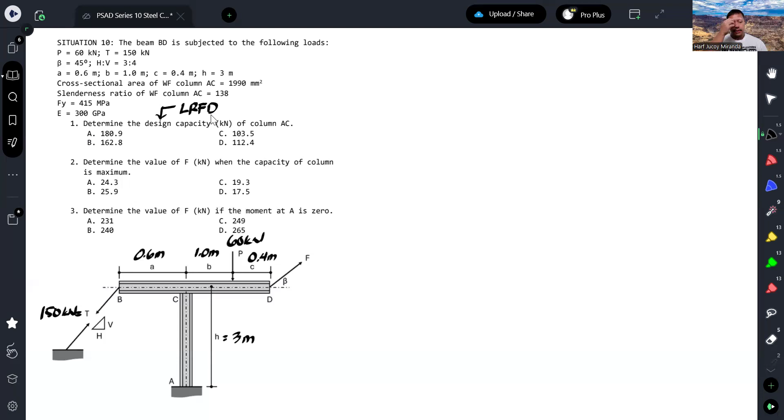So recall, yung slenderness ratio ay kino-compare dun sa limiting slenderness ratio na 4.71 square root of E over Fy. We have 4.71 times square root of E over Fy, that gives us 103.4. That means this is larger, so yung column natin ay long. Pag magko-compute tayo ng FCR, ang formula ay 0.877 of Fe, where Fe is the Euler's buckling stress, pi squared E over slenderness ratio squared.

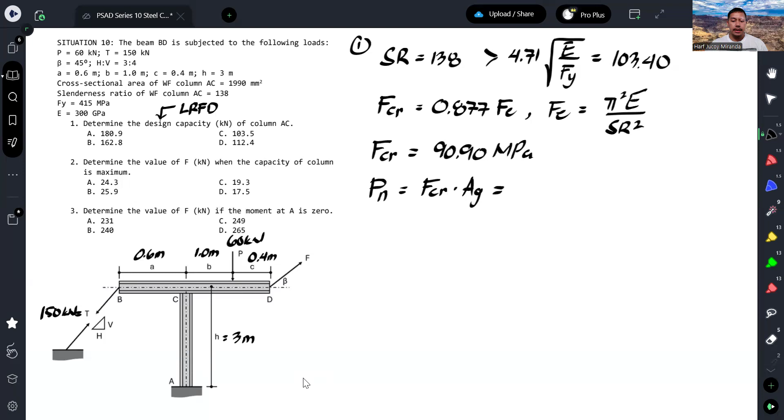So computin na natin kaagad yung FCR: 0.877 of pi squared E over the slenderness ratio squared. So 90.9 megapascal. Then the nominal strength is just FCR times the gross area, 1,990. This is in Newton, so divide by 1,000. That's 180.89 kilonewtons. Therefore, our answer is letter A.

Dagdag ko na lang sa discussion, kapag yung slenderness ratio ay mas mababa sa limiting slenderness ratio, yung gagamitin mong formula for FCR is 0.658 raised to Fy over Fe, times Fy. Yun lang yung pinagkaiba. This is for NSCP 2015. Pero for the old NSCP code,

yung slenderness ratio, i-compare natin sa square root of 2 pi squared E over Fy, which is Cc. Kapag ito ay mas maliit, intermediate column, so medyo mahaba yung formula. The allowable stress is equal to 1 minus slenderness ratio over Cc squared over 2, times Fy over factor of safety. Yung factor of safety is 5 over 3 plus 3 over 8 slenderness ratio over Cc minus 1 over 8 slenderness ratio over Cc cubed.

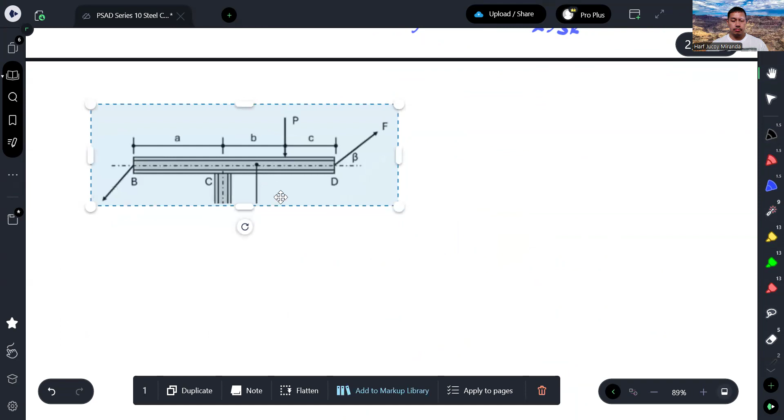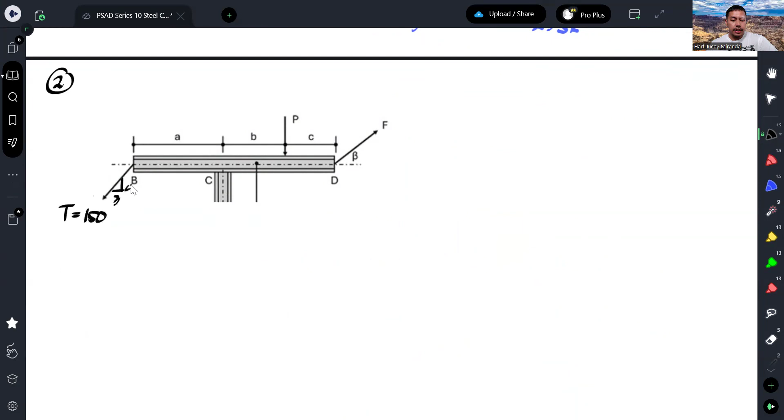Dito, ang gagawin natin is i-free body diagram natin yung beam lang. I-isolate natin yung beam. So this is for number 2. According to the given, this is tension equal to 150. Ito ay 3 horizontal, 4 vertical, so malamang 5 na to. This is 60 kilonewtons. Ito ay 0.6, ito ay 1, ito ay 0.4. Tapos ito ay 45 degrees.

Tapos yung force dito, i-set natin na equal sa 180.89 kilonewtons. Pinapahanap lang yung F. Para makuha natin yung F, we can take summation of forces vertical. Let's take summation of forces vertical.

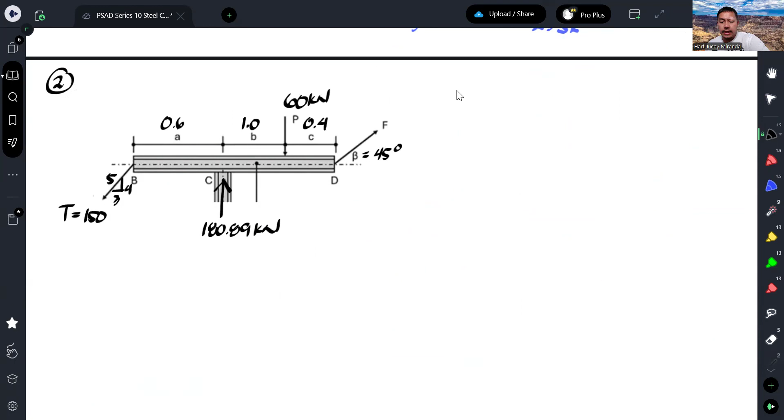Okay, so the reason why I want to use summation of forces vertical, yung meron pa kasi ibang force na nag-act dun sa C. Meron pa tayo, take note, meron pa tayo dito horizontal force na unknown, Cx. Ito yung Cy. Kasi di ba nakakonekta yung beam natin doon. So pag nag-summation of forces horizontal tayo, dalawa pa yung unknown. Pero pag nag-summation of forces vertical tayo, itong F lang yung unknown. Kaya yun yung napili ko.

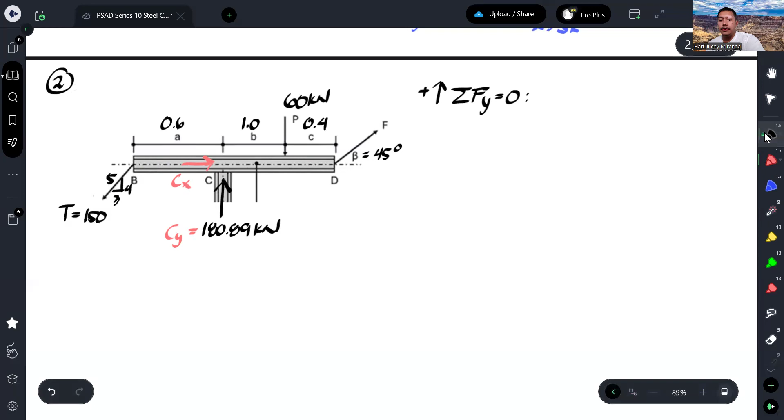So we have downward yung 60. Downward din yung Y component ng 150. And then upward yung capacity ng column. And then ano pa? Upward yung F sin 45. Okay, and from here we should be able to calculate F.

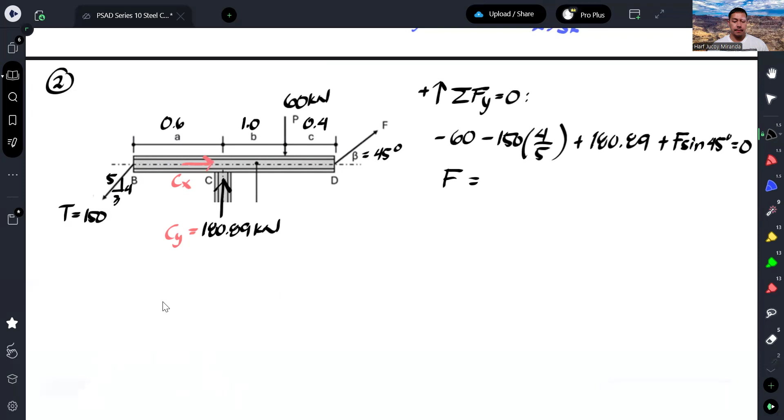So that's 60 plus 150 times 4 over 5 minus itong 180.89 over sin 45. Okay, sorry. Actually, doon sa previous na sagot natin, dahil design capacity nga pala ang tinatanong, hindi nominal, hindi ito yung sagot. Okay, so mag-iingat tayo sa mga ganyang question sa board exam. So hindi ito yung sagot.

Ang hinahanap sa atin is yung design. So ibig sabihin yung merong reduction factor. So actually patibong din to sa choices. Trap yan. So ang kailangan natin is actually yung phi Pn, which is phi 0.9 ng Pn. So times natin ng 0.9. So ang tamang sagot ay 162.8 kilonewton. So the correct answer should be 162.8. So this should be letter B.

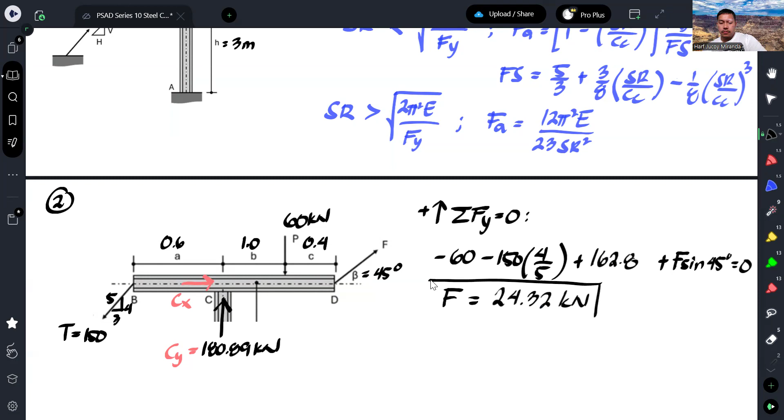So trap yung letter A, kasi nominal lang to. Ang hinahanap natin is design, ibig sabihin yung meron ng reduction factor. So dapat ito ay 162.8. Our calculation earlier, i-revise lang natin to na 162.8. And the answer is 24.32. So that is the value of F kapag yung capacity ng column natin is maximum, which is yung design capacity niya.

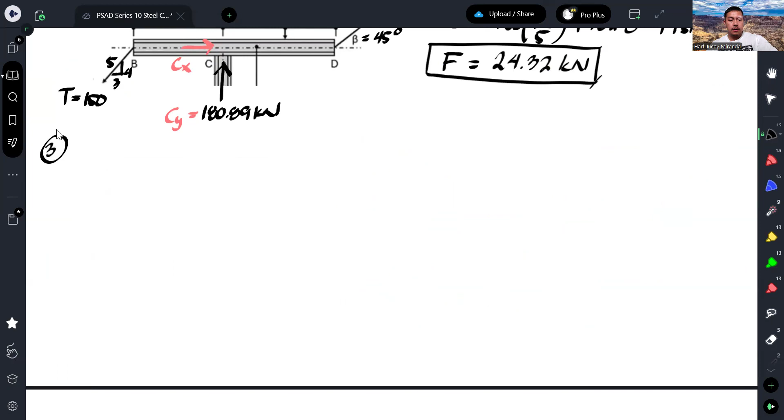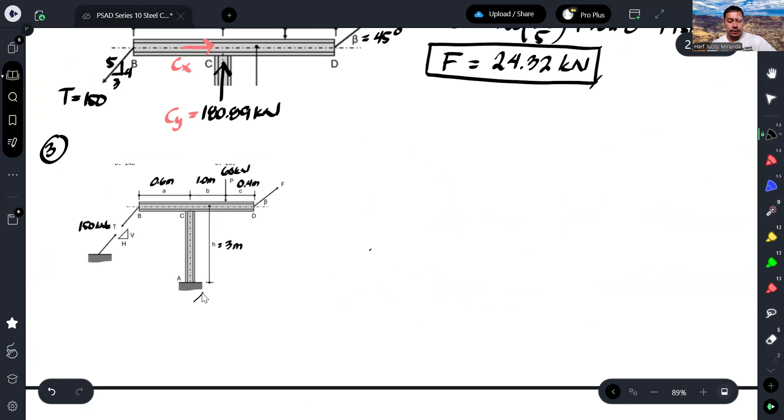And then finally, determine the value of F if the moment at A is 0. So basically, i-adapt lang natin itong free body diagram na to kasi kung dito tayo mag-free body diagram sa beam, hindi natin ma-expose itong support sa A. Kaya mag-i-stick ako dito sa free body diagram na to, so I'll just copy this for number 3. So ang moment sa A ay 0. So para mahanap natin yung F, we will just take summation of moment at A and equate it to 0. Let's assume counterclockwise positive.

So first, merong components ito, vertical and horizontal. Yung horizontal component niya ay 150 times 3 over 5, since 3 horizontal, 4 vertical. Ito naman ay 150 times 4 over 5. Tapos ganun din itong force F. Meron siyang horizontal and vertical component. Yung horizontal component niya is F cosine of beta, and yung vertical niya is F sine of beta. So yun yung mga iikot sa A natin.

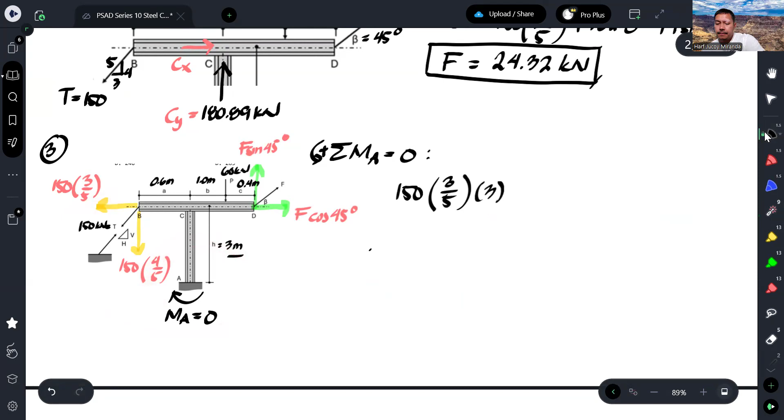Unahin natin itong sa kaliwa. So 150 times 3 over 5. Ang moment arm natin is itong 3, so times 3. Ang rotation nito about A will be counterclockwise, so positive. Plus 150 times 4 over 5; ang moment arm para sa vertical component is 0.6, also counterclockwise, so plus. And don't forget, meron ditong 60 kilonewton; ang moment arm niya is 1, and ang rotation niya ay clockwise, so negative.

And then we have F sine 45, na ang moment arm ay 1 plus 0.4 or 1.4, and the rotation is counterclockwise, so positive. And then we have F cosine 45, na ang moment arm is 3, and the rotation is clockwise, so negative. Of course, may reaction pa dito na vertical at horizontal, kaya lang dun tayo nag-moment, kaya wala nang moment yung mga yun. Plus, yung moment sa fixed support ay 0. So ito na equation natin, and we should be able to solve for F.

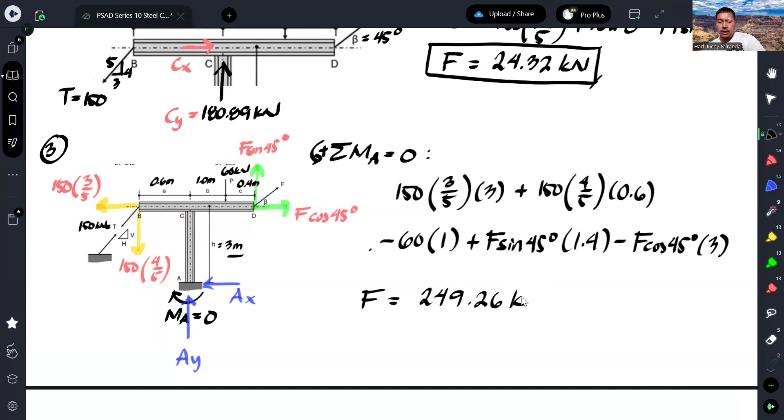So 150 times 3 over 5 times 3 plus 150 times 4 over 5 times 0.6 minus 60 times 1, over 1.4 sine 45 minus... actually dapat baliktad. Pag transpose, ito yung negative, ito yung positive. Or pwede kayo mag-shift solve. So we get 249.26 kilonewton. So that will be our answer for the last question. So this is how we solve this problem.

This is similar to last year's board exam.